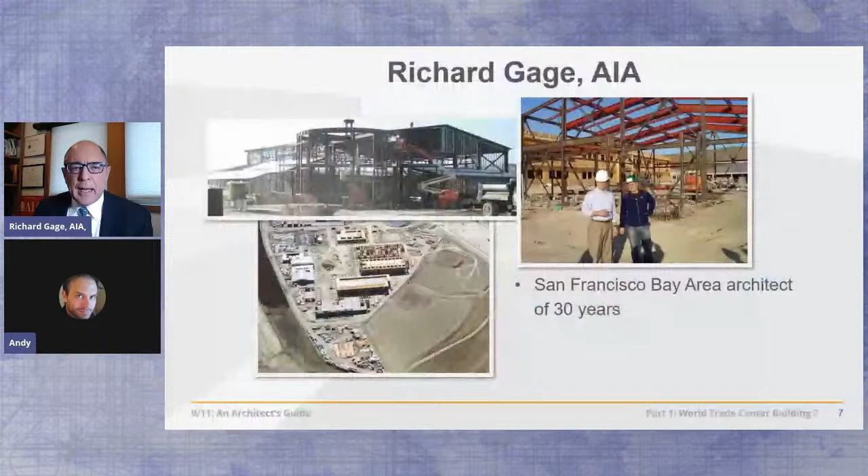Thank you, Andy. Just so people know something about my background: I was responsible at a local firm here in the San Francisco Bay Area for the construction documents for these $3 and $10 million gymnasiums. More recently, before launching full-time into this outreach effort, I had similar responsibilities working on this $125 million high school, and also this project in Las Vegas with 6 blocks of retail, mid-rise office space, and parking structure, altogether about 1,200 tons of fireproofed steel framing.

I now work full-time educating architects, engineers, and others to understand what really happened at the World Trade Center using the material in these courses. So let's jump into it.

Did you even know? I didn't. When I first got into this in 2006, I was shocked to learn there was a third skyscraper that came down on 9/11. Most architects and engineers are completely unaware of it, even though it's the third worst structural failure in modern history. So don't feel bad if you didn't know about it—most people don't. We're starting with this today because, according to the official story, nobody died in this building, so it didn't receive the attention it should have.

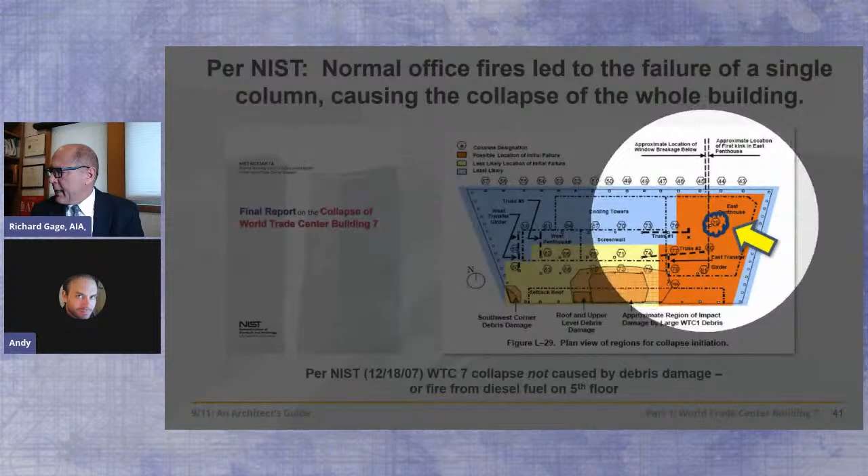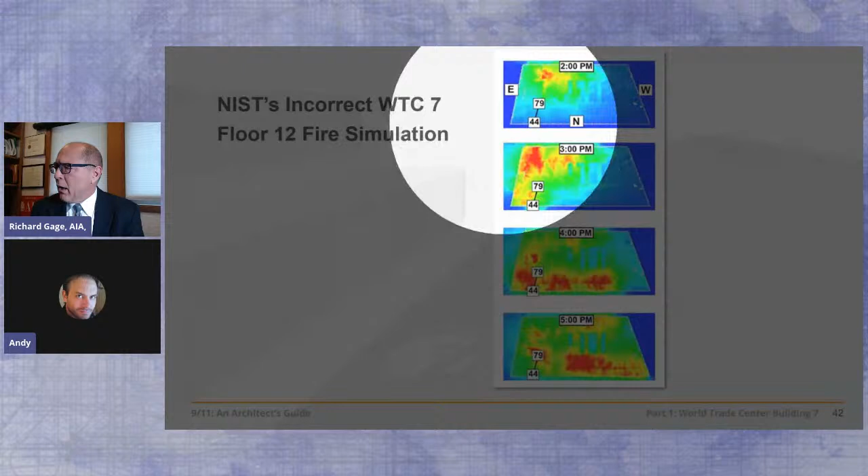Column 79 is the area of concern. The damage was on the other side of the building, so that's why they're suggesting it was relatively insignificant in the building's collapse. But they have a path of the fire that they claim it took, being the fire on the 12th floor, because that's of critical concern for them, as that fire moved its way over to column 79, hovering around column 79 on the northeast side of the building for about an hour and a half.

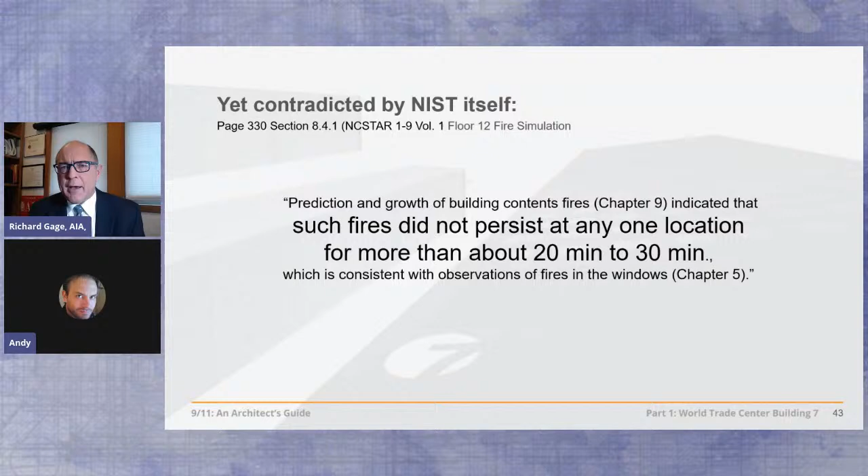So we find there's a problem with this—not just one problem, but as NIST even acknowledges, fires don't persist in any one location for longer than 20 or 30 minutes. So how can it be hovering in that area for an hour and a half? That's a critical problem and inconsistency for them to solve.

But more importantly, those fires were burned out on the 12th floor, according to the photographs, more than an hour before the building collapsed. And as you'll see, their entire collapse theory revolves around that fire burning on that floor at that location at the time of the collapse. So this is critically important.

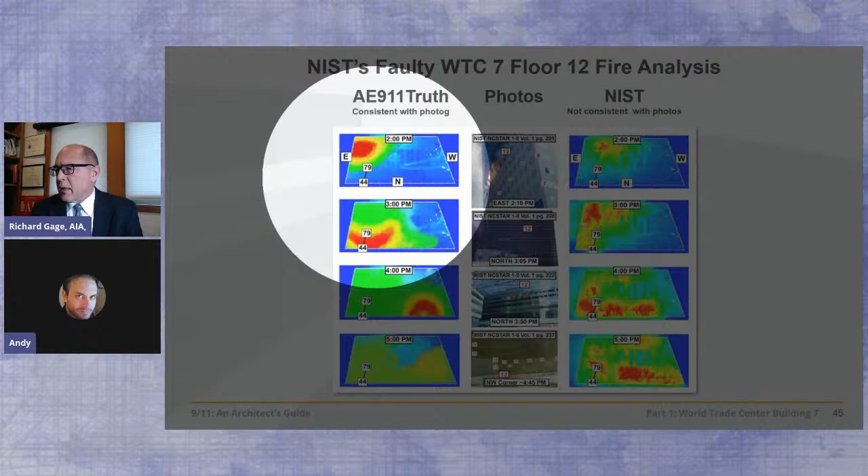Now, more correctly, the photographs show that fire—according to our own simulation, we have the fires starting at 2 o'clock on the east side, moving past column 79. By 4 o'clock they're well past column 79, as the photographs and videos reveal. And their fires completely burned out on that floor before the building collapses, even at 5 p.m. So that's really, really important.

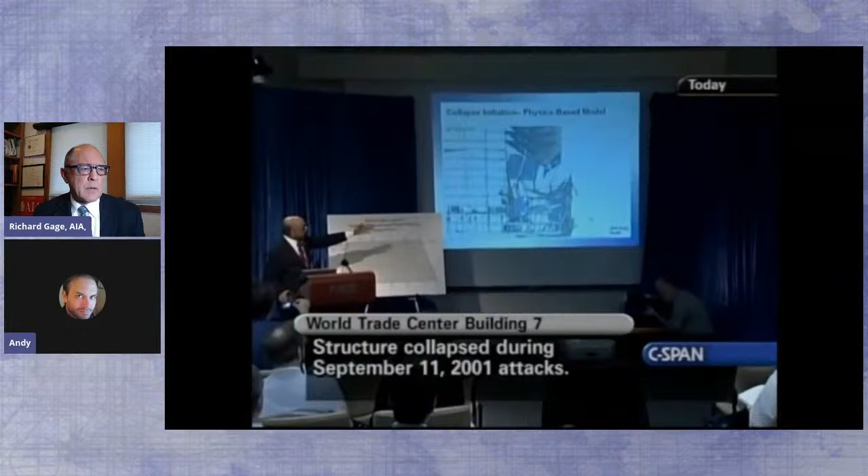Okay, so fire is inducing a progressive collapse by thermal expansion. Let's go a little deeper into their computer model. You can see on the screen, the column at the very right is column 79. That's the column that first buckles, causing the floors to come down, followed by a quick succession of failures of adjoining columns.

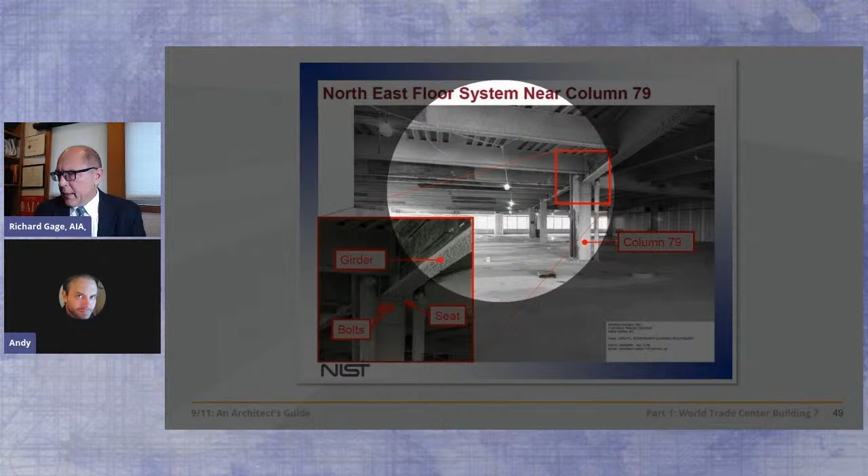Okay, let's break that down. Let's look at the actual theory here. What they're saying is that the fire near this column 79, raging in this area at the time of the collapse, caused these beams to expand—that's the thermal expansion part of their story—pushing this girder off of its seat on column 79, causing floor 13 to fall on 12, 12 on 11, and so on for 9 floors, leaving column 79 unbraced, at which time it buckles, causing this progressive collapse on the east side of the building that they claim then took another 7 seconds to drop the whole building straight down uniformly, as you saw in the videos.

So none of that could actually be true, and let's just break it down. These beams are fireproofed. They're not going to be able to attain the heat required to expand them. And here you can see halfway through the application of that fireproofing—this one's not fireproof, this part of it is. They're just not done yet.

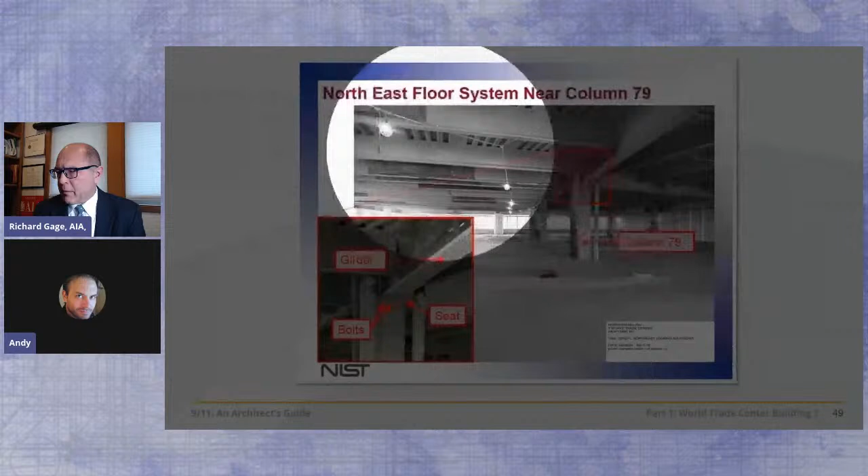That fireproofing, as you'll see later, is at minimum 4 times more fireproofing than is needed to protect that beam from thermal expansion. That's because the fire only lasts 20 minutes in a given area, while the fireproofing lasts 2 hours on beams in these steel frame high-rise buildings.

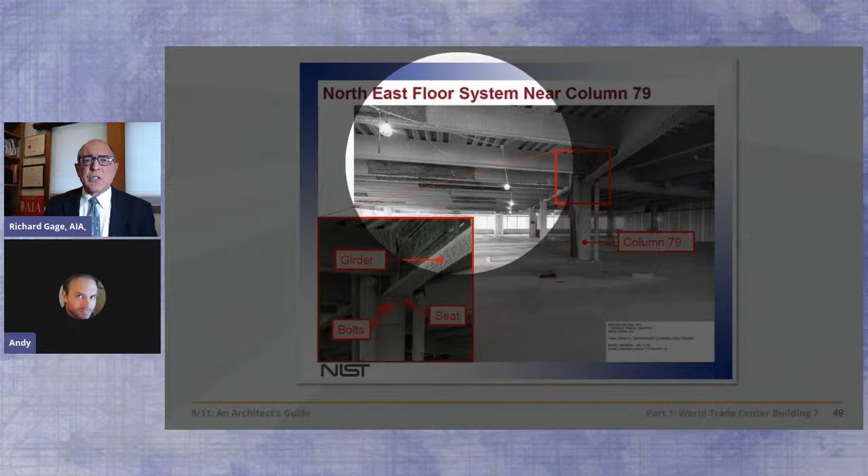So not only that, but the girder could not have been pushed even if that beam did expand. And by the way, they got that beam to expand by putting all of the heat, like 1400 degrees Fahrenheit, into that beam in just 1.5 seconds in their computer model, which would have forced it to expand rather than sag. But no, they needed it to expand because they needed this girder to fall off of its seat.

So they claimed that there were no shear studs on this girder, even though the shop drawings indicate that there were, as you can see here. 30 shear studs, which are bolts that are embedded in the steel, welded to the steel and embedded in the concrete slab up above. So that girder is not going to be pushed sideways.

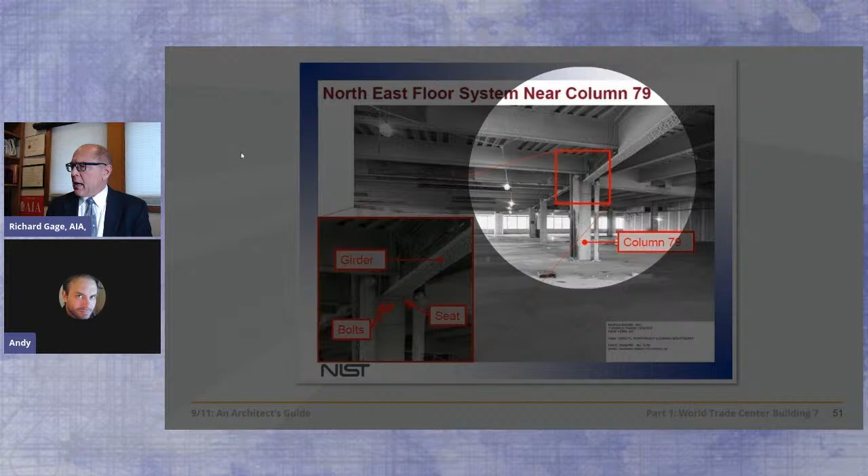No way, no how. But they ignore that key structural component, and they claim that this girder pushed off of its seat. Now here's the seat. It would have had to have been pushed 12 inches in order to be pushed off of its seat. The thermal expansion, even if these beams were pushing on it, could only have pushed it about 5 inches.

Well, NIST said it only had to be pushed off 6 inches, because the flange, the bottom piece of this wide flange beam, folded after the web crossed the end of the seat. So they ignored another key structural component in order to make that happen.

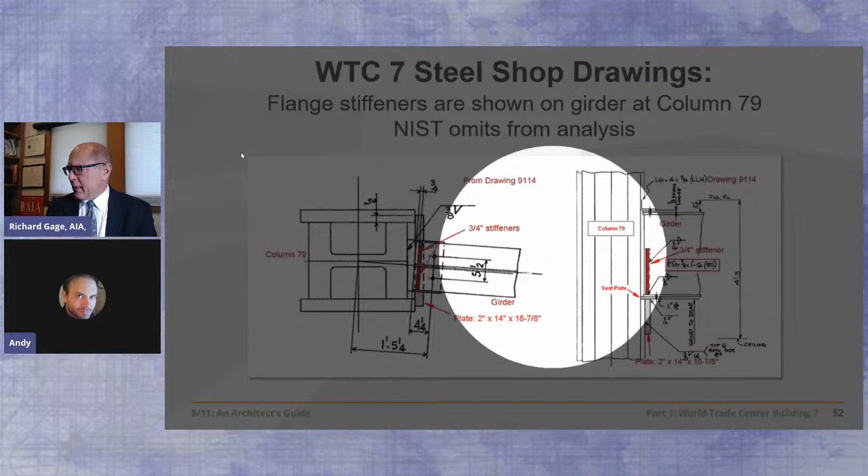These 3/4 inch stiffeners shown in red here in plan, and here, and here in elevation. So those were in fact there. The shop drawings here show them.

So there's only one reason NIST could have had for ignoring them: so that they could make this claim that this girder pushes off of its seat in this direction, and only halfway, and then the flange folding. Well, those stiffeners would have kept the flange from folding.

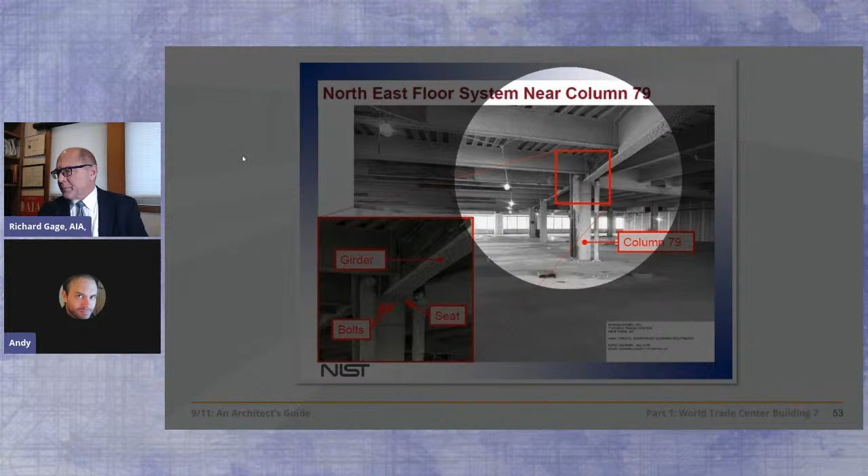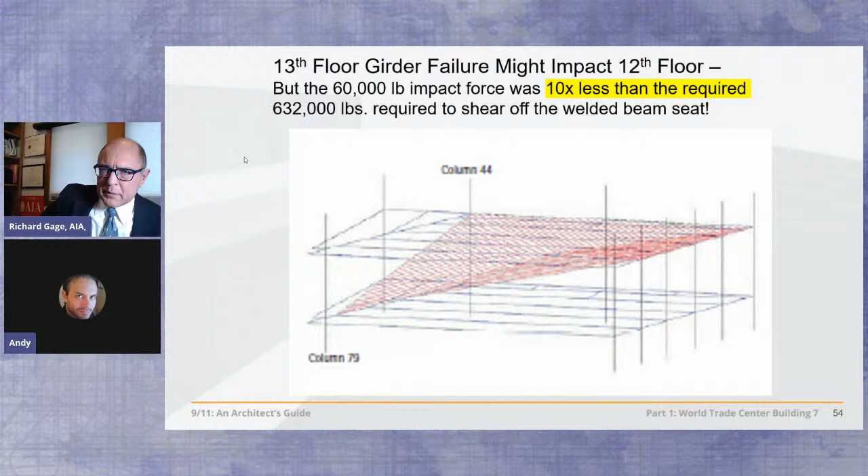So even if all of that could have happened, you would not have had floor 13 falling, because there's two other major girders framing into that column, which would have kept most of that floor from ever falling at all. In fact, it would have taken 10 times more dynamic force than was available in this system in order to break the floor connections, girder connections below.

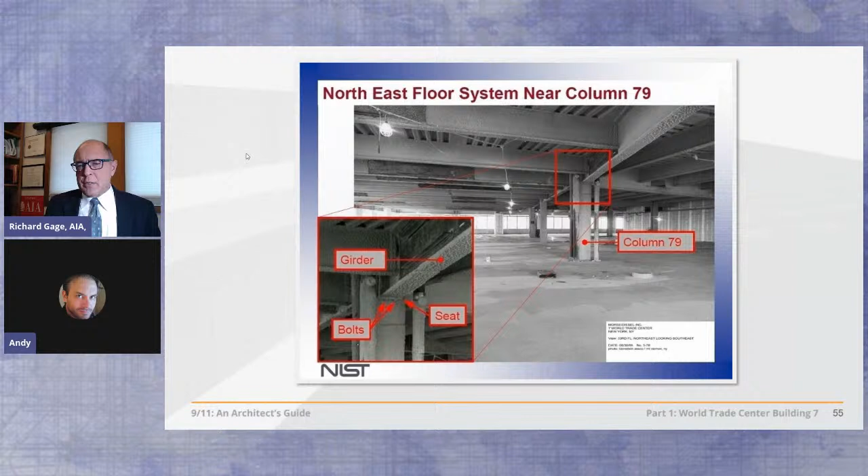It would have taken 632,000 pounds, but there's only 60,000 pounds available. So that progressive collapse never could have happened, even if all of their fanciful machinations in this initiation of collapse theory were true.

Let's go ahead and look at their computer model, because it's even more revealing. Here is our structural model showing the building collapsing, which matches quite well with the video of the event, they claim. We'll see how well it matches. In fact, let's do that right now.

Here's the video on the left. The penthouse comes down first, okay, we'll give them that. But then there's a complete destruction of almost every connection holding the steel frame together on the east side of this building, and it begins to warp like a beer can, like you'd expect it to, because those beams are tied to the exterior perimeter structure.

So you'd expect massive deformation on the exterior of the building with any interior progressive collapse commencing. But you don't see that in the video whatsoever. You see maybe a dozen windows broken, indicating there's some shock to the building, but not the scale of destruction that we're seeing. And even they stop the computer simulation 2 seconds into the collapse, indicating that they don't want us to see any more of the overall collapse.

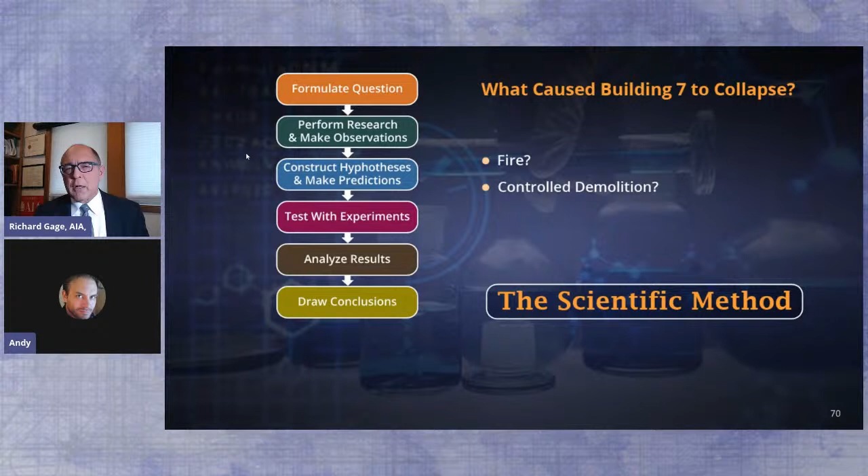If the hypothesis is corroborated, we report the results in an open, transparent manner. We don't hide the computer input data from the architects and engineers who might peer review the work, especially in a public investigation like all of 9/11 was or should have been.

If a hypothesis is not corroborated, we go back, we try again, we come up with new hypotheses until we have one that is corroborated by the data, the experiments, the predictions, etc., until it all makes sense. So with that in mind, let's do just a little bit of background research, which NIST apparently failed to do.

How have buildings been destroyed by fire? Well, not in a high-rise building have we ever lost a high-rise due to fire, a steel frame high-rise, fireproofed. But fire is an organic process.

It moves through a building every 20 minutes or so. It burns out, because even NIST acknowledges that fires don't last longer than 20 or 30 minutes, even though their whole theory relies on an hour and a half of the building on fire on that floor.

The skyscrapers we have not lost. In a wood frame building, it would have fallen over to the path of least resistance, not straight down through the cold, hard, intact structure beneath the level of the fire. We would never expect a pancaking collapse due to fire.

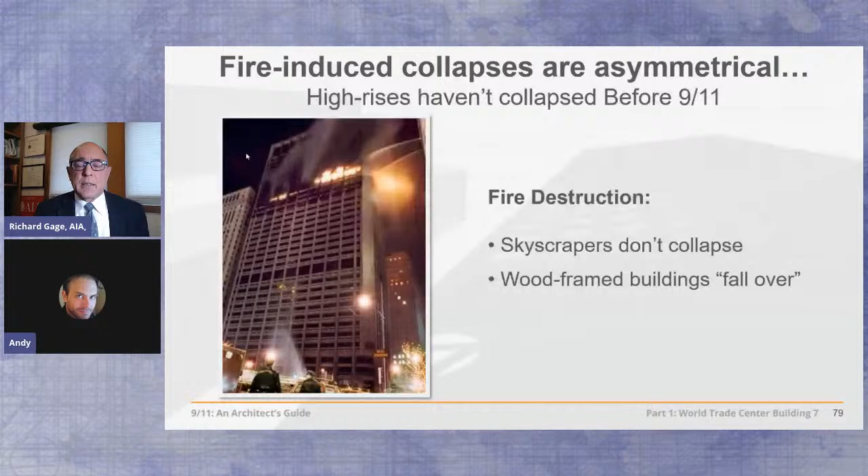Well, what would we expect in a steel frame building on fire? We had the largest test of its kind in the UK in 1995. They had incredible fuel loads. As you can see here, they really wanted to know what happened to these beams.

So they built this 8-story building out of steel, as you can see, some of which is fireproofed and some of which is not. They tested every condition. It was a very rigorous test. This was the largest test of its kind ever conducted.

It showed how unprotected steel can be distorted, even by a normal office fire. But as is typical in steel buildings, the structural beams only slowly and progressively warped and sagged. There was no chance of a sudden collapse.

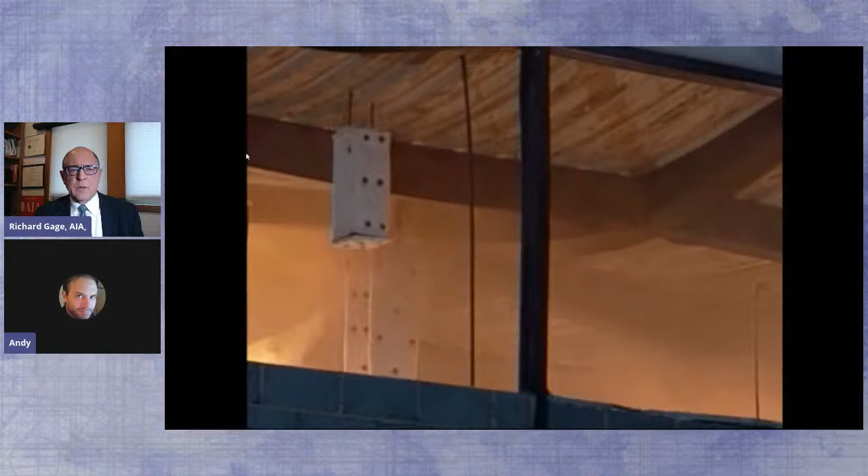In over 20 years, I have not seen, until recently, a protected steel structure that has collapsed in a fire. He's referring here to before 9/11, when we had not 2, but 3 protected steel structures collapse due to fire that day.

The executive summary cites that this is inherently stable behavior due to the highly redundant nature of the structural steel form. The connections do not fail. NIST had 400 structural steel connections failing per second during the 7 seconds of the overall collapse of that building.

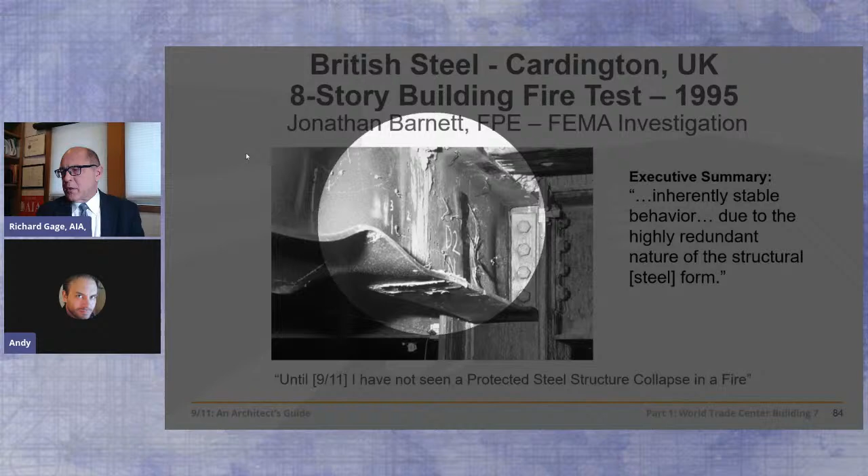There's warpage that can occur, certainly, on non-fireproofed portions of this test building. All of Building 7's steel was fireproofed. So we haven't lost a skyscraper that's fireproofed, steel framed, due to fire.

Let's look: May 4th, 1988, the First Interstate Bank, a 62-story building in Los Angeles, California, suffered a 3.5-hour fire which burned across 5 floors and caused an estimated $200 million of damage. It did not collapse. February 23rd, 1991, the One Meridian Plaza, a 38-story building in Philadelphia, suffered an 18-hour fire which burned across 8 floors.

The fire caused an estimated $100 million worth of damage and 3 firefighters died fighting it. It was later described by officials as the most significant fire of the century. It did not collapse. October 17, 2004, the East Tower of the Parque Central complex in Caracas, Venezuela, suffered a 17-hour fire which spread across 26 of its 56 floors.

It did not collapse. August 18, 2007, a fire broke out on the 17th floor of the Deutsche Bank building in New York, a building undergoing deconstruction after being heavily damaged by debris from the South Tower on 9/11. Originally 41 stories in height, it had been reduced to 26 at the time of the fire, which lasted 7 hours and affected a total of 10 floors. 2 firefighters died of smoke inhalation.

It did not collapse. On 9/11 itself, 5 World Trade Center, a 9-story building east of the North Tower, was engulfed in flames after sustaining heavy damage from falling debris. A number of partial collapses occurred, but the overall structure remained standing.

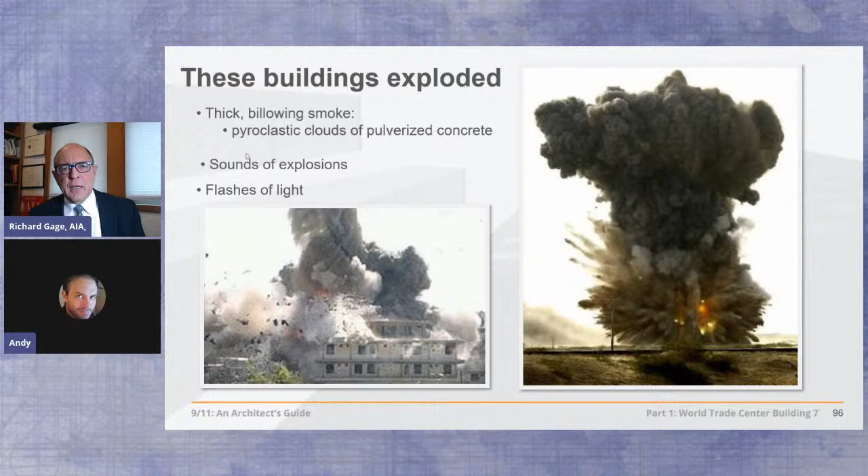We have witnesses that hear sounds of explosions. They see flashes of light. If we have these features, we know we have explosions.

Explosions can be harnessed quite effectively in high-rise buildings to bring them down, as you see in this series of controlled demolitions, just like the old hotels in Las Vegas that we've all seen on TV. There's only a handful of companies that can accomplish this. It's actually quite intricate engineering to place these shaped cutter charges throughout the columns and beams in the building at key locations and detonate them in a very precise order in order to bring the building down how they want.

So there's a set of features associated with these demolitions. What are they? Let's look at them. We have a sudden onset of destruction, usually at the base of the structure, but not always - it can occur other places too.

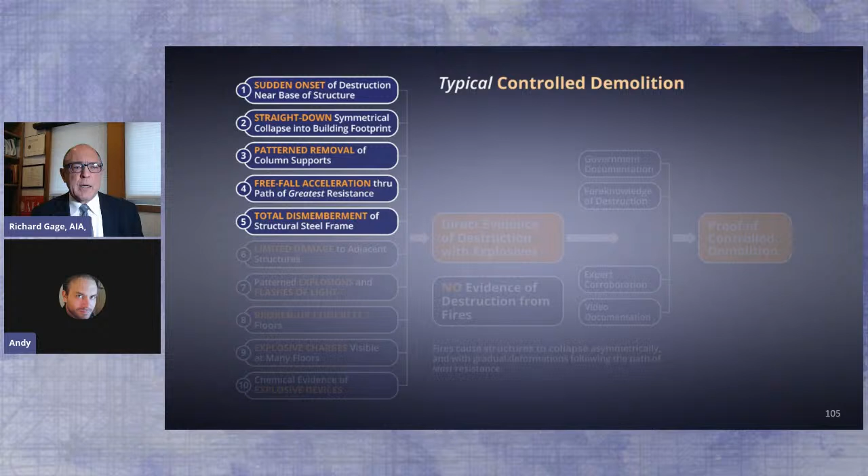Straight down, symmetrical collapse into the building's footprint. They do that by removing the column supports all at once on a given floor, or within a fraction of a second of each other. This results in a near free fall acceleration straight down through the path of what should have been the greatest resistance - the thousands of tons of structure beneath - resulting also in the total dismemberment of the structural steel frame. With limited damage to adjacent structures - that's one of the goals of controlled demolition.

Feature 7: there's patterned explosions heard by witnesses and flashes of light seen by them. The concrete floors are broken up, if not pulverized, as we'll see in Building 7. They don't want to have to go back and jackhammer concrete floors, so they let the explosives do that work. And so there's explosive charges visible at many of the floors. Sometimes these are called squibs in the explosives demolition industry. And of course, chemical evidence left behind of explosive devices.

If you have these features, you can be sure that you have destruction with explosives. Fire doesn't create these features, any of them, let alone all of them. Fires cause structures to collapse asymmetrically with gradual deformations following the path of least resistance.

With additional circumstantial corroborative testimony and evidence - eyewitness testimony like government documentation - that can be very helpful. You don't just bring one of these buildings down without a series of approvals from various agencies, typically. So there's foreknowledge of the destruction. Therefore, people know about it in advance. They talk about it - we'll see some of that today.

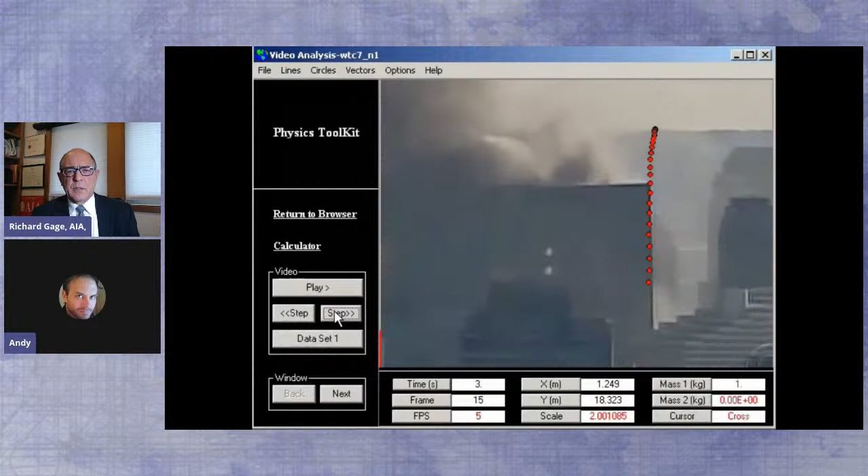Take a look at physics teacher David Chandler's analysis here. Just by watching it, anybody can see that Building 7 fell close to free fall. To measure it, I used software to track the corner of the building and compute a graph of downward velocity as a function of time. The graph had a long, straight section indicating constant acceleration. Measuring the slope, I found the acceleration to be within 1% of the acceleration of gravity for the first 2.5 seconds. In other words, the building fell through its own structure with zero resistance.

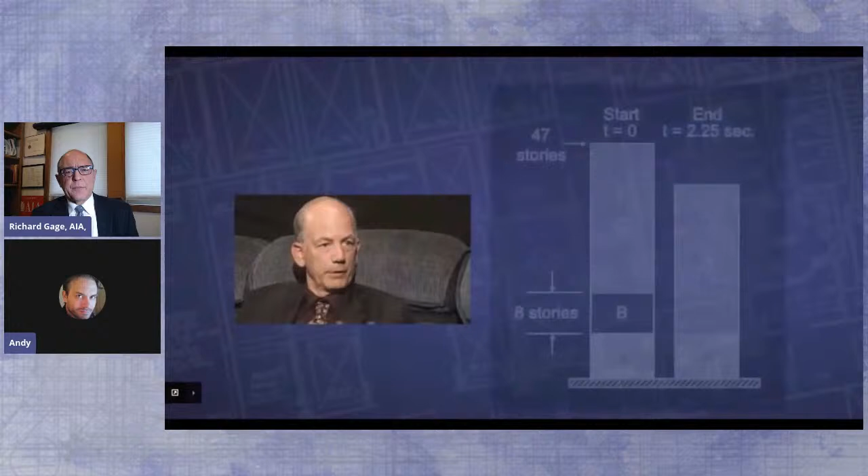Zero resistance? This building had 40,000 tons of structural steel in its structural system, and that is intended to keep it from going anywhere. NIST is telling us that the building below it ceased to exist for the first few seconds of the collapse. Well, things in physics just don't cease to exist and cease to resist the forces that are on them.

The building didn't disappear, so the building can't fall for 100 feet at free fall speed. That's impossible. That's a violation of the fundamental law of physics that says for every action, there's an equal and opposite reaction.

Indeed, there is. In fact, steel columns have a particular property that even after they buckle and bend, they will always have a minimum of about 25% of their strength left to support. It won't necessarily support the building, but it will slow down the acceleration.

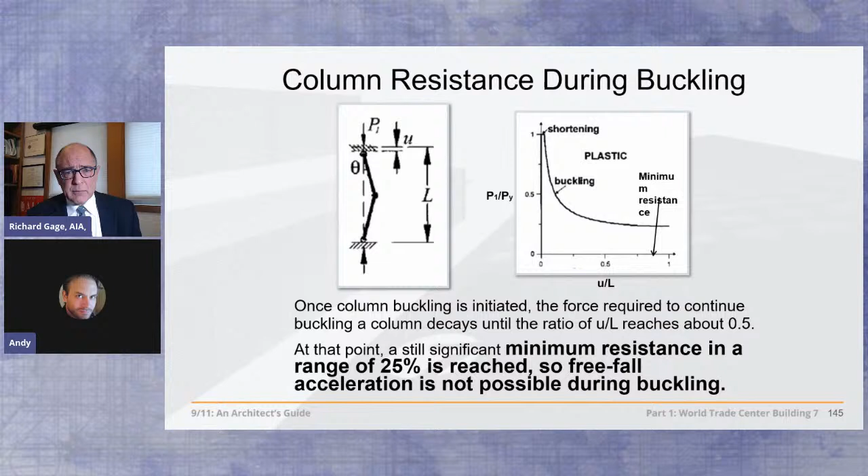But even NIST acknowledges there was no slowing down. It accelerated faster and faster, the velocity increasing each second, the definition of acceleration. It's as fast as a bowling ball falling out of the sky, which means zero resistance, which means not one of those 82 columns on each floor gave any resistance during a third of this building's 7-second collapse.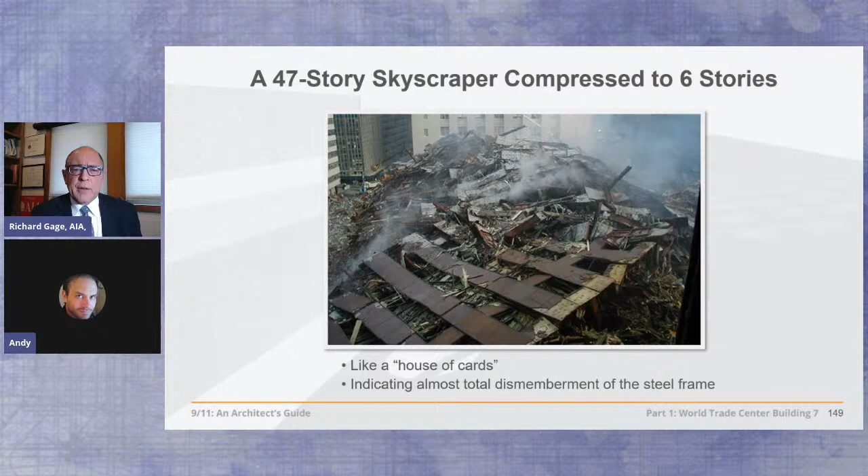Think about it. It can't happen. And do we have the total dismemberment of the structural steel frame? Yeah, it falls like a house of cards. Every column is dismembered almost from every other beam attached to it. Remember, buildings that collapse naturally, you don't have the severing of the columns from the beams.

Some of them certainly in badly damaged buildings like this. Do we have limited damage to adjacent structures? Yeah, there's fairly limited damage. The Verizon building and the post office sustained some damage, but the center of the pile is in the center of the building's footprint.

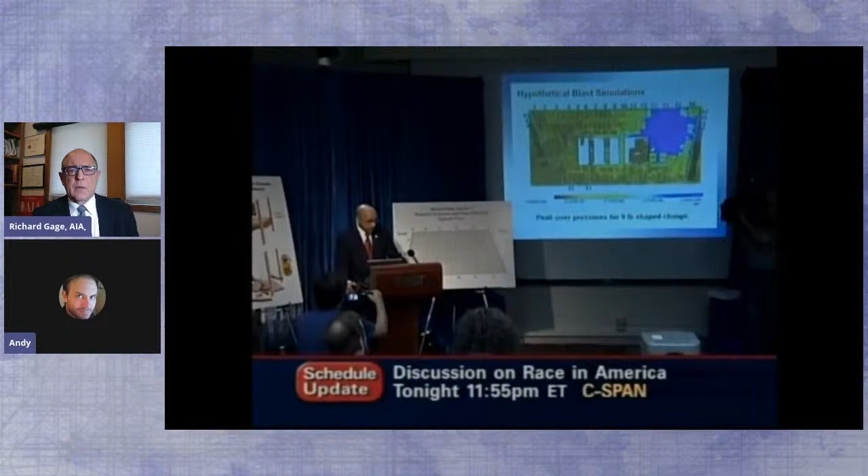Do we have sounds of explosions heard by witnesses? Well, let's go first to the official story. We did not find any evidence that explosives were used in the collapse of Building 7. We ran detailed computer simulations of blast scenarios. This size blast would have produced an incredibly loud sound that was not recorded on videos of the collapse nor reported by witnesses. Well, there are plenty of witnesses, and I'll show them to you. And we'll look at some technology that has even softer sounds to bring down buildings.

First, Daryl, a medical student: We were watching the building because it was on fire. The bottom floors were on fire, and we heard a sound that sounded like a clap of thunder. We turned around and were shocked to see it looked like there was a shock wave ripping through the building, and the windows all busted out. It was horrifying. Then about a second later, the bottom caved out, and the building followed, crashing down all the way to the ground.

Let's go to Kevin McPadden, former Air Force medic: And then it was like another 2-3 seconds, you heard explosions, like boom. It's a distinct sound. It's not like when in compression, like boom, boom, boom, boom, floors dropping and collapsing. This was boom, and you felt a rumble in the ground, like you wanted to grab onto something. That, to me, I knew that was an explosion. There was no doubt in my mind.

And this gentleman, Bill Rizzotti, was here when it all happened. He saw it for himself. Bill, tell us what you saw and heard. I was standing like 2 blocks away, and all of a sudden I just seen a big flash, and then I seen the building coming down, and I just seen people running everywhere, chaotic like.

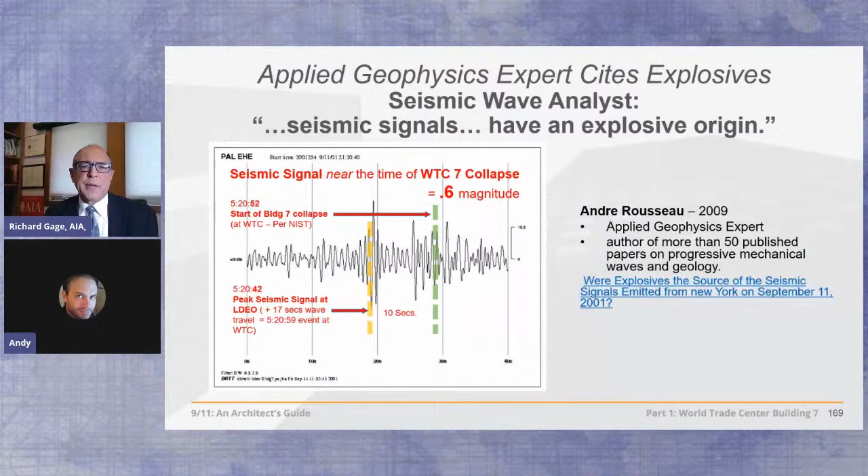Now, Andre Rousseau comes along, a geophysics expert, author of more than 50 published papers on progressive mechanical waves and geology, says no, these undeniably have an explosive origin. The bell-like form of the graph points to an impulsive source of energy, not percussion on the ground due to the falling of debris. Seismic waves are only created by brief impulses and low frequencies. These undeniably have an explosive origin.

Okay, what else can we learn from sources like the National Fire Protection Association Guide 921 for fire and explosion investigations? Because we're looking here for answers to where all these pyroclastic-like clouds and extreme heat came from. It says in the manual, look for large volumes of gas and the large amount of heat released in chemical explosions, causing rapidly expanding plumes of hot gases.

Well, this is exactly what was observed directly after the collapse, or as the building's collapsing, racing 35 miles an hour away from the collapse of Building 7. These clouds are expanding in every direction in cauliflower-shaped forms, expanding rapidly, many, many times larger than the building. Where's all the heat coming from that's responsible for this cauliflower-shaped expansion?

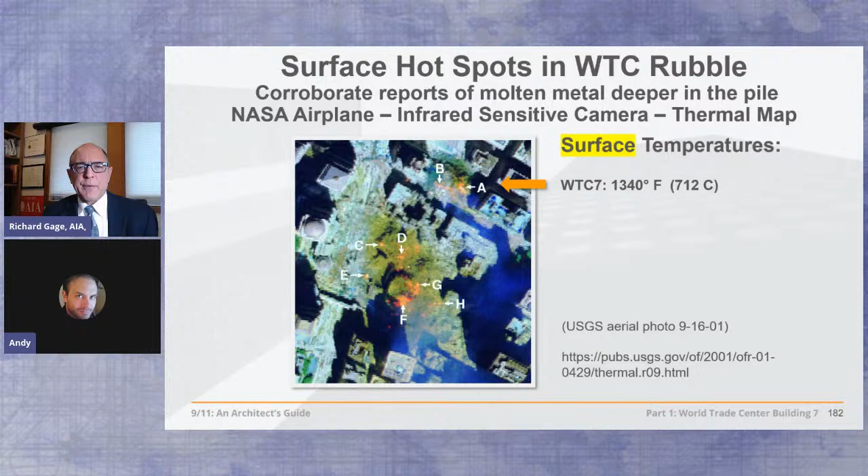But do we have a fire on the surface of this building aftermath? No, there's no fire. Again, surely the fires were put out. Why is there 1,340 degrees on the surface? It's surely evidence of something much hotter down deep in the pile, which as it reaches the surface is cooled off to 1,340 degrees. And we find such evidence.

Let's start with structural engineer Abolhassan Astaneh-Asl: I saw melting of girders at the World Trade Center. Office fires don't melt girders. I saw melting of girders in World Trade Center.

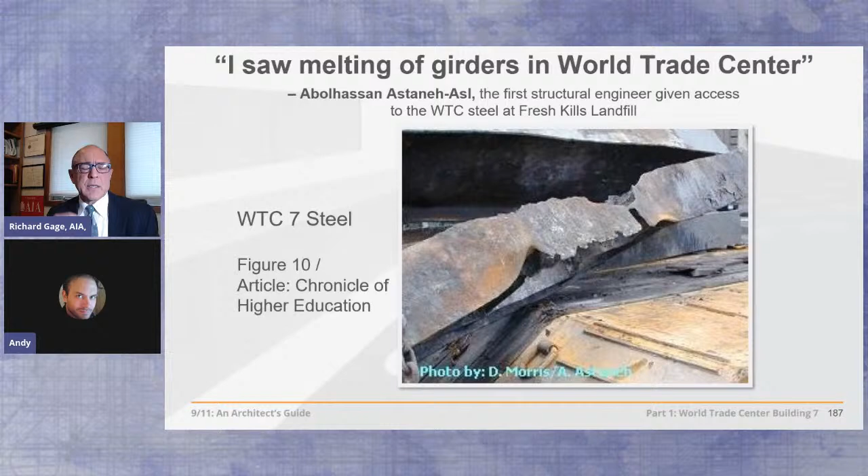Well, these are the melted girders he's referring to in part, and this is one that he documented from the World Trade Center 7 steel. That is the melted girder. Again, steel doesn't begin to melt until 2,800 degrees, more than twice the temperatures of the hottest office fires. This fire engineer says steel members in the debris pile appear to have been partly evaporated in extraordinarily high temperatures. The author of the FEMA report, fire protection engineer Jonathan Barnett.

There's a problem here, though. It takes 5,000 degrees to evaporate steel, more than 4 times the temperature of most office fires.

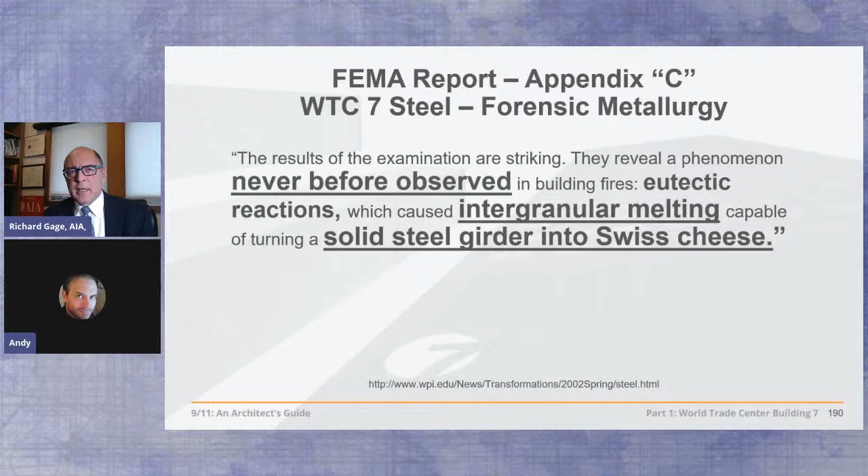This is actually documented in the FEMA report, which came out before NIST took over the investigation. Appendix C of the May 2002 Building Performance Team report documents never-before-observed eutectic reactions, intergranular melting, capable of turning a solid steel girder into Swiss cheese, like we see here in this piece of World Trade Center 7 steel. Rapid oxidation and sulfidation, the report finds. Liquid iron, that's molten iron, that's 2,800 degrees minimum Fahrenheit.

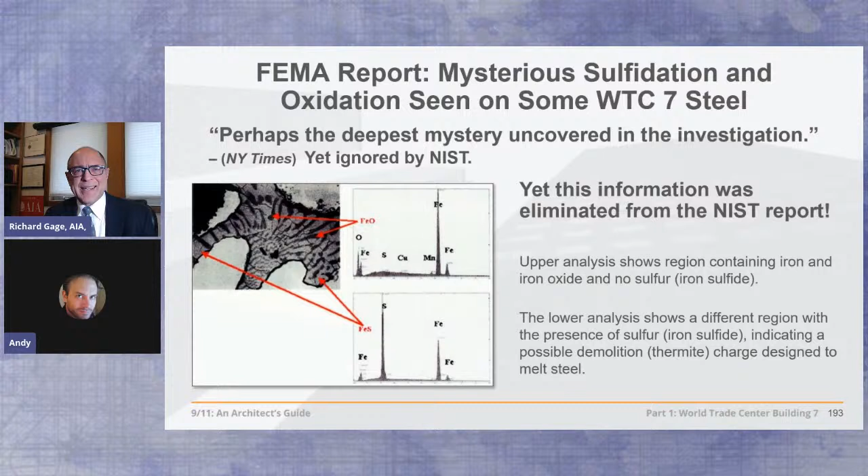Sulfur formed during this hot corrosion attack on the steel. They have no idea where the sulfur came from. Perhaps the deepest mystery uncovered in the investigation, says the New York Times, but this is completely eliminated from the report when NIST takes over. In fact, the whole report, Appendix C, metallurgical investigation, is eliminated from the NIST report, not included in the NIST report.

NIST says, oh, we couldn't test, we had no steel from World Trade Center 7. Well, you just saw the steel, but again and again and again, they lie, saying that there's no steel recovered, no metallography could be carried out. Well, we actually have metallography samples from NIST, and they show temperatures not exceeding 250 degrees Celsius.

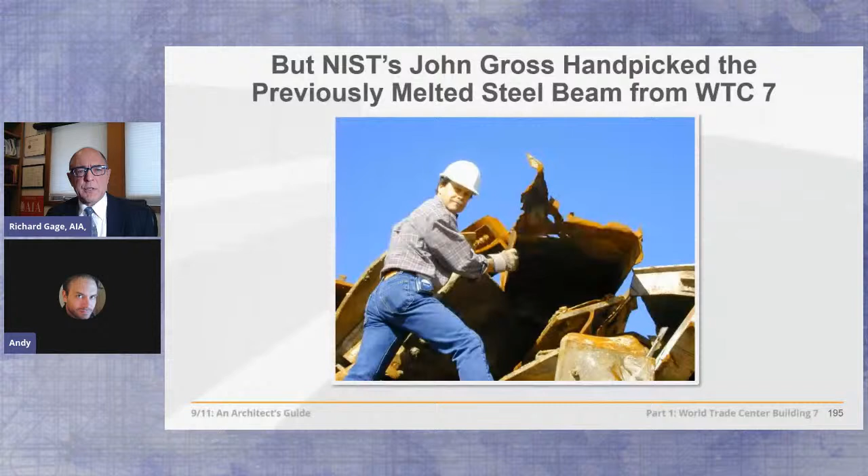That was in the World Trade Center Twin Towers. Here they're talking about 7. But here's the piece of steel they did recover. So they are lying. Here's John Gross on the pile, proudly showing the coupon or steel sample that was given to FEMA to include in Appendix C. And then John Gross saw fit to eliminate that when they produced their final report on Building 7. His shadow is all over the evidence.

So maybe the fires, according to Thomas Eagar, were 1,200 degrees Fahrenheit. There's a range of fires. NIST claims in the Twin Towers 1,800 degree fires. We'll get to that next week in parts 2 and 3, particularly 3, of this series.

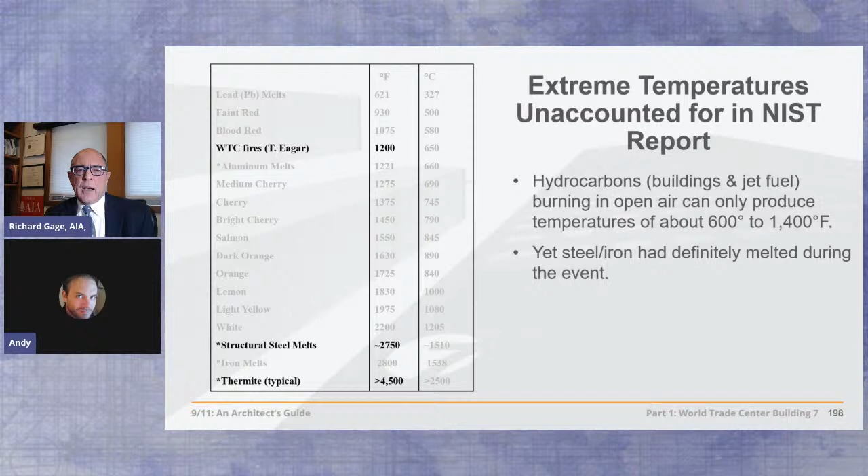Structural steel doesn't begin to melt until 2,750 degrees. What could be responsible for these temperatures? Well, hydrocarbons, which is building office contents and jet fuel even, only burn 600 to 1,400 degrees. Yet steel had definitely melted, as we see here in this debris, in the aftermath, in the jaws of this crab claw excavator. We can tell by the color of molten metals what their temperature is. In this case, exceeding 2,500 degrees, liquid molten metal falling.

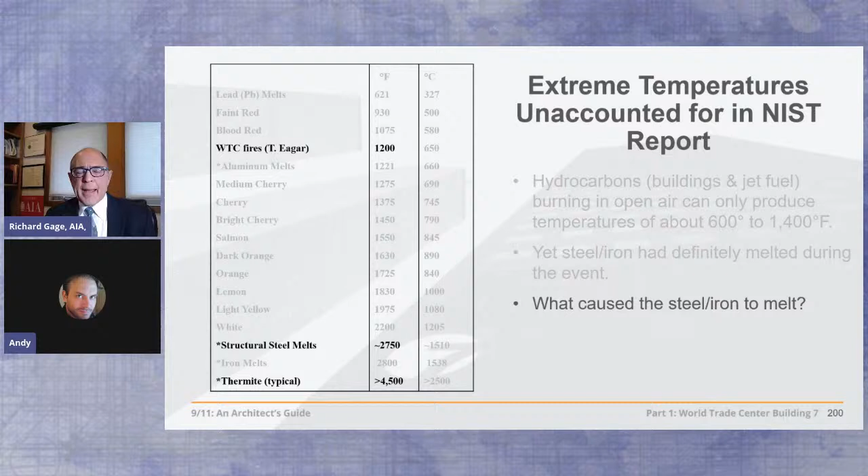So we know how hot it is, and we know that office fires don't get that hot. So what does? Let's look at thermite as a possibility. That's a rational hypothesis because it has some characteristics that match the evidence.

So what is it anyway? An incendiary used by the military, thermite is a compound of iron oxide and aluminum, which when ignited sustains an extreme heat reaction, creating molten iron in just 2 seconds. Thermite can reach temperatures over 4,500 degrees Fahrenheit, quite enough to liquefy steel.

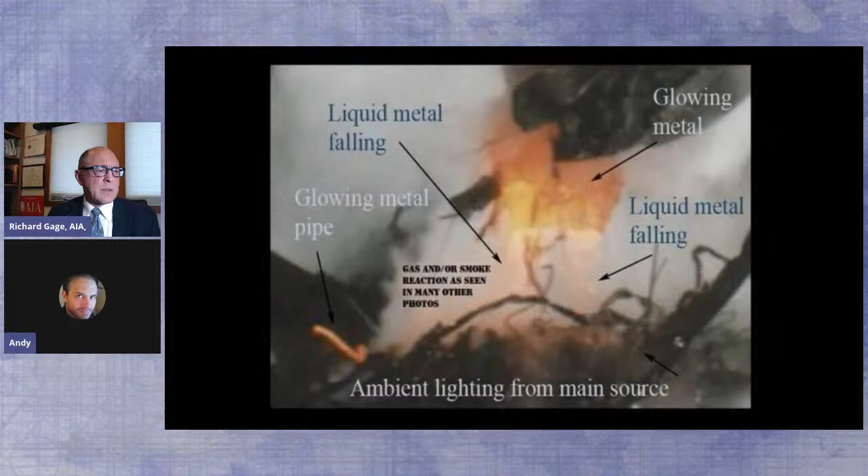We know that open-air fires cannot burn hot enough to melt steel, but metal had melted at the base of the towers. Appendix C of the FEMA report describes sulfur residues on the World Trade Center steel. The New York Times called this the deepest mystery of all. Sulfur slightly lowers the melting point of iron, and iron oxide and iron sulfide had formed on the surface of the structural steel. Sulfur used with thermite is called thermate, producing even faster results.

Maybe we're getting somewhere here, because if thermite were used, it would explain the incredible heat, 4,500 degrees Fahrenheit, that the official story can't possibly explain. And so they don't try.

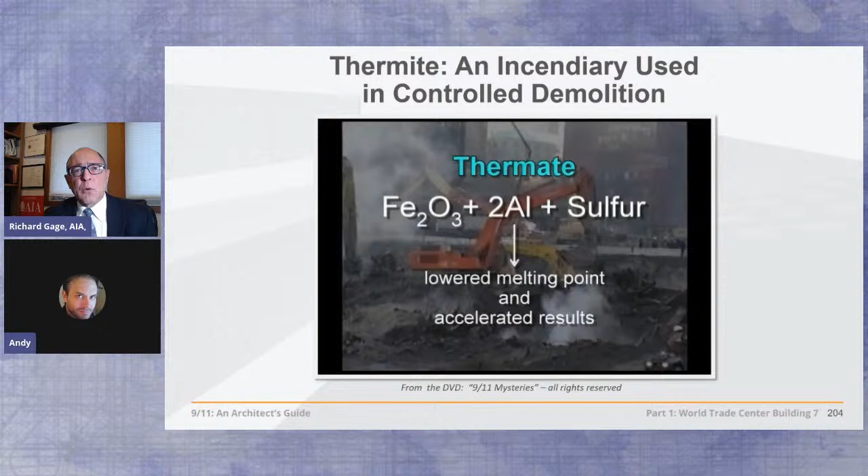It would also explain the presence of sulfur, because sulfur is added to thermite to become thermate, becoming much more effective at cutting through steel. And it would also explain the vast presence of elemental iron. Molten iron is a byproduct of thermite, which we're about to show you the evidence of.

So the National Fire Protection Guide 921 says, hey, look for unusual residues that could arise from thermite, magnesium, or other pyrotechnic materials. NIST found no corroborating evidence to suggest that explosives were used.

Did you look? A year later, when pressed, they finally admit in writing that NIST did not test for the presence of explosive residue. You can't find what you won't test for. This is completely disingenuous, of course. Others found it. It wasn't that hard to find.

Stephen Jones, nuclear physicist formerly from Brigham Young University, applies his talents to the effort, having been given a piece of slag from the ends of the steel beam in this sculpture in Canada. He first notes that the beam itself is a jagged cut with thick slag hanging off of it. That's not what oxyacetylene torches and thermal lances do, which is what the iron workers were using to cut the steel at the site. Not this jagged edge as you see here, but a nice clean cut as you see here. Not jagged edges like here with thick slag on them.

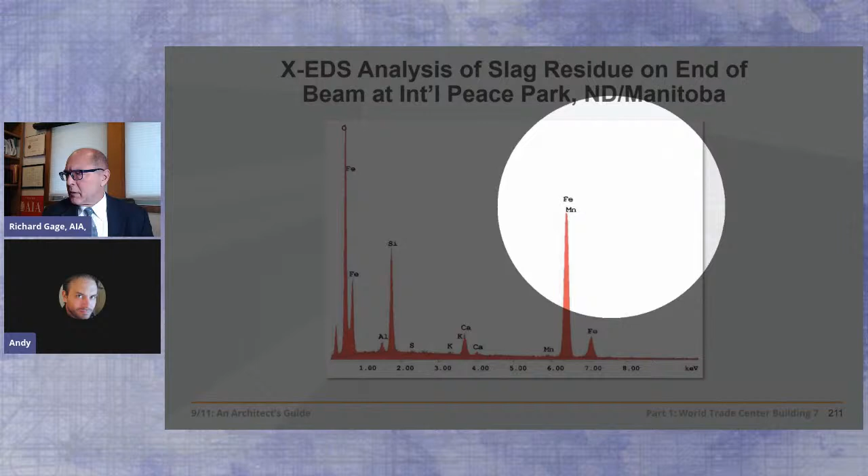But the analysis of this slag produces what? Iron. Elemental iron, not steel, but elemental iron and manganese. And sulfur. And aluminum. Thermite, as you saw, was a mixture of aluminum powder and iron oxide, which is essentially rust.

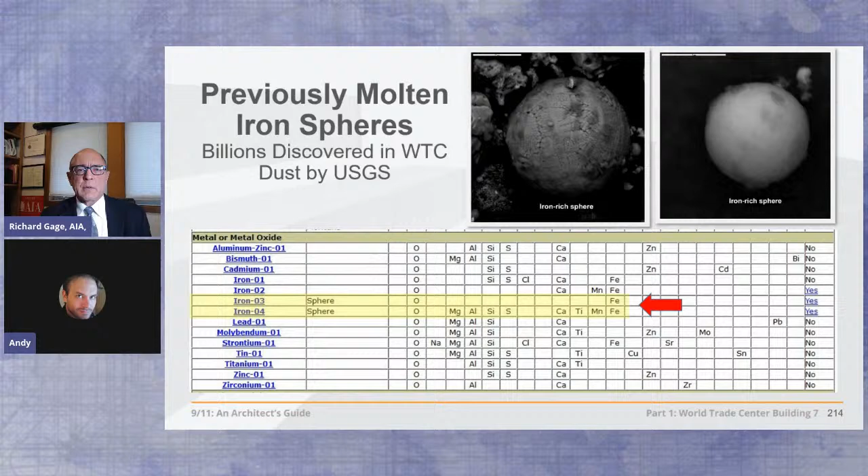So it's very interesting. Why is he finding the ends of these beams having this evidence? Well, he looks at the U.S. Geological Survey itself, in their particle atlas of the World Trade Center dust, who finds in all of their samples billions of previously molten iron microspheres. Billions of them. They don't know where they came from. They don't even speculate. But up to 6% of some of these samples are previously molten iron microspheres, about a 1/16 of an inch in diameter, the largest of them.

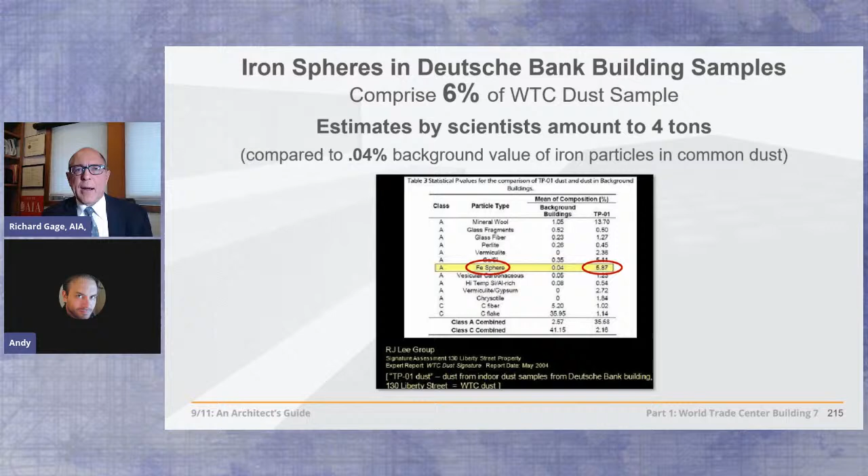Some of them almost invisible to the naked eye. It amounts to about 4 tons of this material by extrapolation, 150 times more than the background value quantities of iron that you can see in office dust. It's just there in the air. No, these are spherical, and they are much more plentiful.

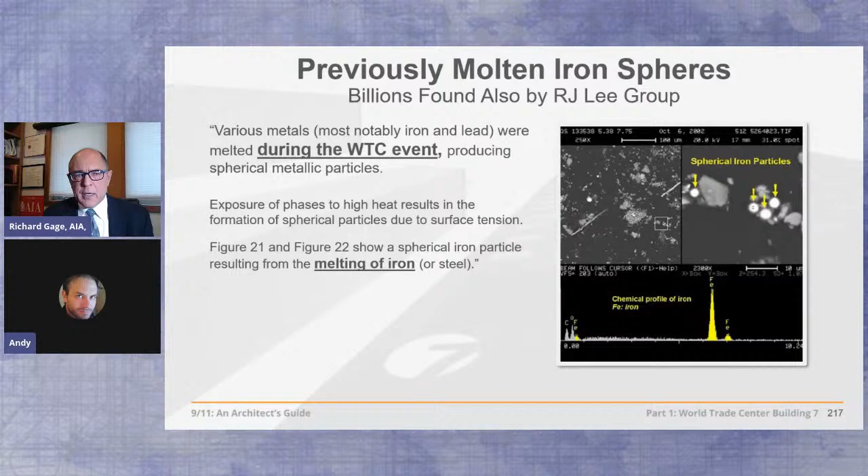In fact, the R.J. Lee Group, an independent environmental engineering firm doing their own studies on the dust, says that they're formed during the event, not before by the welders putting the building together, not after by the ironworkers cutting the building apart, but during the event, the melting of iron, requiring again 2,800 degrees Fahrenheit. In fact, the EPA says this is a signature component used to distinguish the World Trade Center dust from common office building dust. It's not even World Trade Center dust unless it has these billions of previously molten iron microspheres in it. Well, how would they get there?

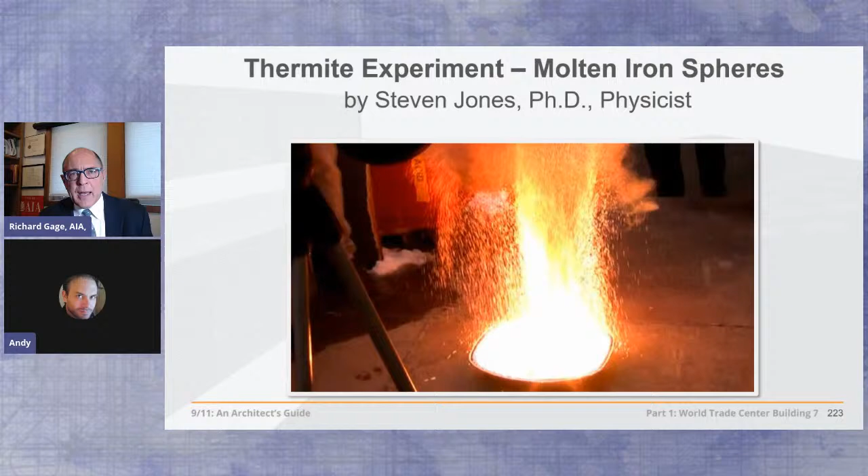Well, here's the thermite experiment. The experiment is the arbiter of competing hypotheses. In this experiment, we have a small amount of thermite, which produces a large flash, extreme temperatures, and lots of what he thought were sparks, but no, this is molten iron microspheres. How do they get spherical? Well, aerosolized liquids form themselves into spheres by surface tension. That's just the nature of what it does.

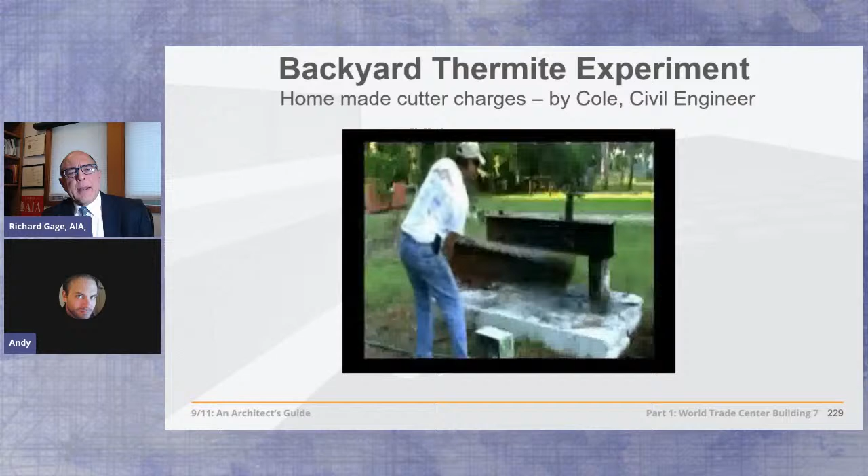So you can make thermite in your own backyard, and cutter charges, as John Cole, civil engineer, did in Florida. Take a look. You can see these explosions, and you can hear them, but they're not quite as loud as the bangs produced by high energy explosives. But they still have sound that's heard, cutting in this case almost cleanly through this beam.

Well, there are much more effective devices, patented prior to 9/11, 2001, that use thermite in shaped cutter charges for the purposes of cutting through much thicker sections of steel, like we have in the World Trade Center buildings. Some of that steel is 3 and 4 inches thick, projecting molten iron in hundreds of milliseconds to cut through. So maybe that's the reason, or one of the reasons, they didn't want to use more commonly applied high energy explosives like C4 and RDX, because they don't have the capability to break through 4-inch thick slabs of steel, as we have near the bottom of the Trade Center towers, all three of them.

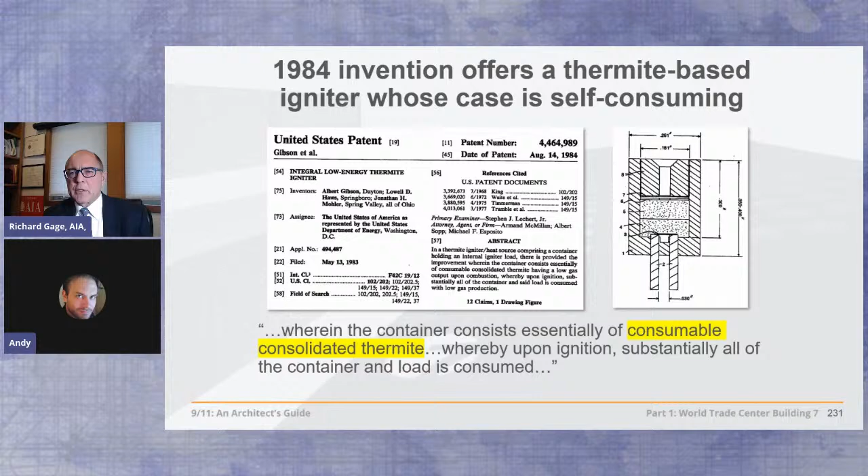And they would also provide a much louder bang and a brighter flash, completely giving away the deceptive controlled demolition that we're looking at in the case of this building's destruction. So we also have a softer signature. In fact, there are similar devices whose casings themselves are made of consumable, consolidated thermite, leaving nothing behind but pools of molten iron, which we have plenty of evidence for, which we'll get to next week in this 3-part series. But what else was found in the meantime in the World Trade Center dust? A 3-inch thick blanket of powder throughout the World Trade Center.

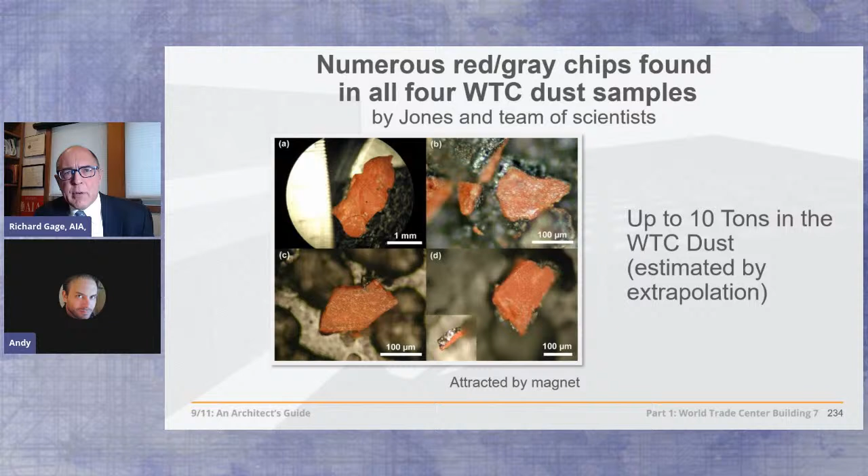Through a rigorous analysis, the samples are red-gray chips they found in them. They're attracted by a magnet. They get real curious—red on one side, gray on the other, dual layered, indicating they were applied by fluid, like a paint. They thought they were paint at first, but they're attracted to a magnet.

So they zoom in and analyze the red layer very carefully. And what do they find? Again, iron and aluminum, the key ingredients of thermite.

But they get real curious now. Zoom in 50,000 times with a electron microscope and find what? Nano-sized particles, 1,000 times smaller than a diameter of human hair, of the ingredients of thermite. Iron oxide crystals, aluminum platelets, set in an organic bed of oxygen, silica, and carbon.

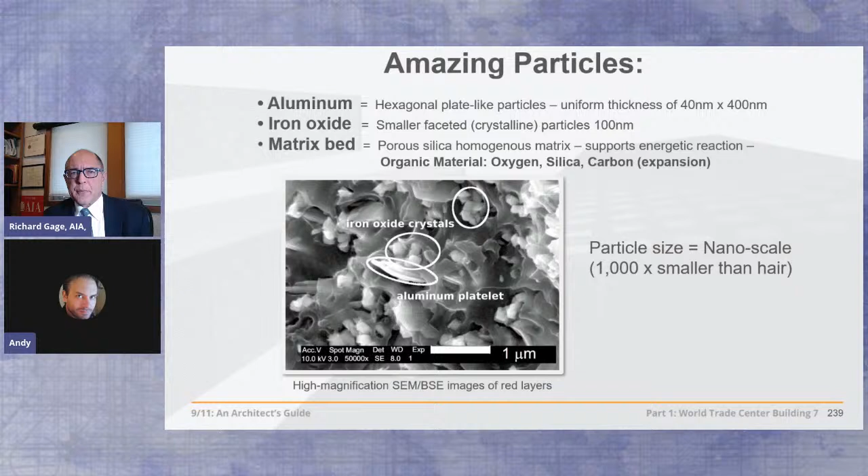Interestingly enough, at 420 degrees Celsius, about 788 Fahrenheit, these samples ignite, producing an exothermic reaction, much more energy coming out of these. It's not paint, in other words.

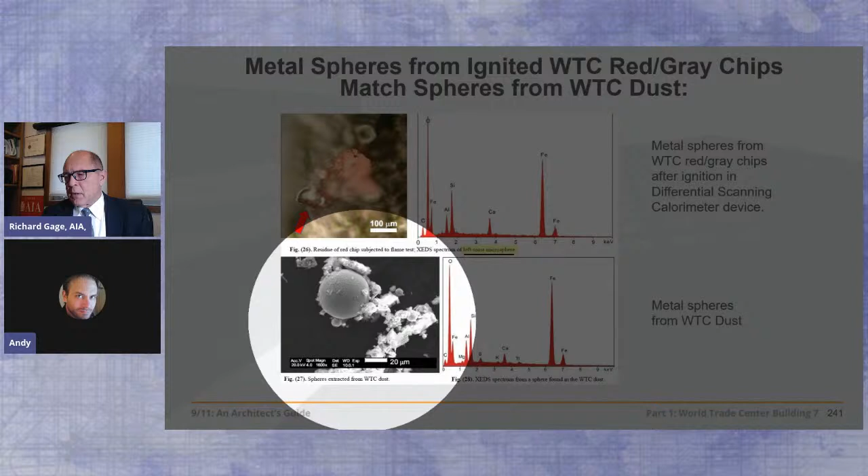And when they do, they produce what? Molten iron microspheres, with the same chemical signature as the molten iron microspheres produced and found in the World Trade Center dust.

So you see, we know where these molten iron microspheres came from. They came from these chips. It's a self-corroborating, repeatable set of experimental data that can be used to prove exactly what brought down the World Trade Center, and those responsible, because this is very sophisticated stuff.

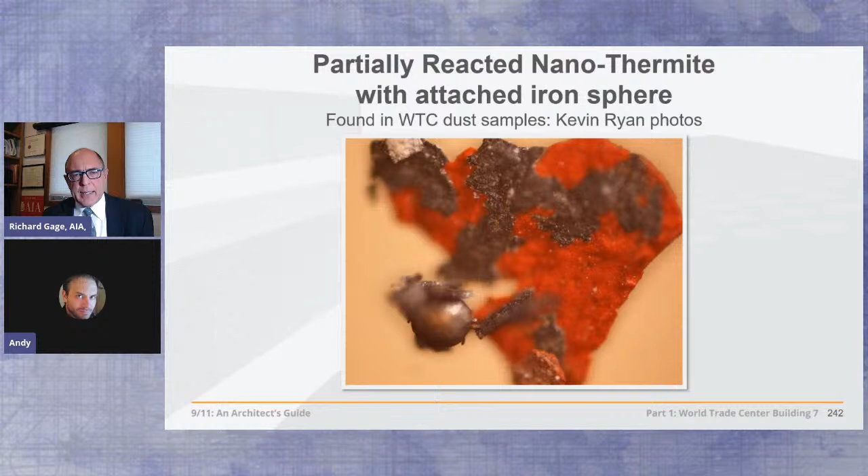As if we didn't know where these spheres came from, they're found attached to partially ignited red-gray chips, as you see here and here. When you get materials down to this size at the nanoscale, the chemical reaction is virtually instantaneous. So they've engineered something that is an incendiary to become more explosive.

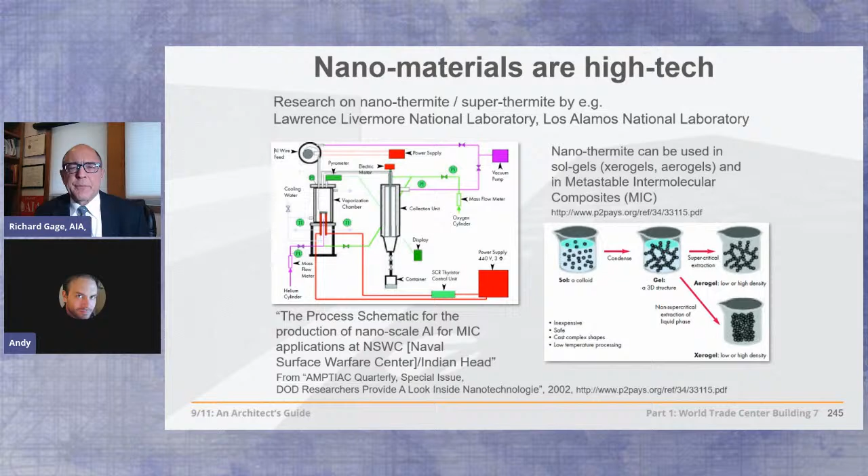Don't try this at home. It's made only in the most advanced defense contracting laboratories, not in a cave in Afghanistan. The 25-page peer-reviewed report concludes that this is active, unreacted thermitic material, a highly energetic pyrotechnic or explosive material.

It remains unchallenged. People say, oh, that's paint, but they don't produce peer-reviewed papers dismissing the results of this work. That's how you challenge somebody's conspiracy theory—if it's peer-reviewed, you put forth a paper, and this has not been able to be accomplished.

So what we're looking at is direct evidence of destruction with explosives. Fire doesn't create these features, any of them, let alone all of them. And fires, again, don't do that.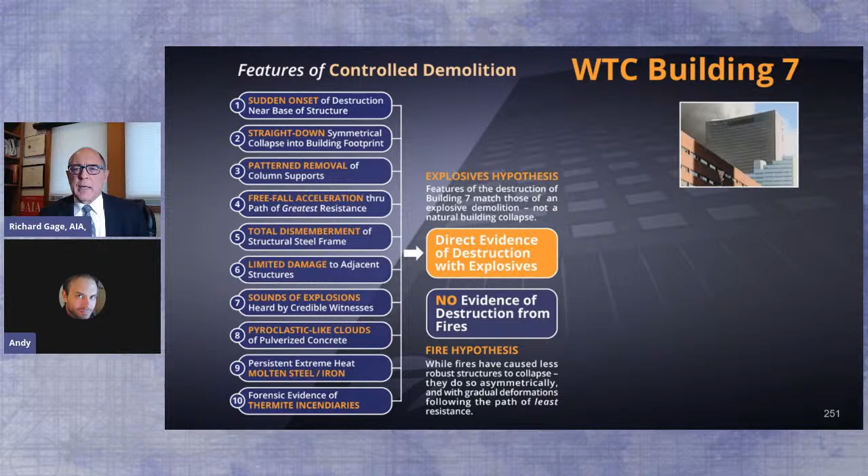Why? Well, let's look at some of the reasons. Steel conducts that heat away from the source—it's a conductor of heat. And so the steel beam never gets to that critical temperature, or rarely, 1200 degrees Fahrenheit, at which it can lose half of its strength and begin to sag.

Especially when we fireproof it, it doesn't happen. We put 2-hour fire protection on the beams. That means the beam will last 2 hours before it sags, before it's compromised. 3 hours on the columns.

And again, the fires can only last 20 or 30 minutes. So this is 4 to 6 times the protection that's needed.

We also keep the contractors from building the buildings out of combustible materials, and we keep the tenants from bringing in huge fuel loads. So we don't have these kinds of problems. In addition to all of that, we put fire sprinklers in the buildings to put them out.

In the case of Building 7, it's said that the lower half of the building's fire sprinklers were compromised by the damaging of the water mains from the destruction of the towers when they went down earlier that day.

So we look at the investigations into the building. 2002, we talked a little bit about the FEMA report. They had $600,000 worth of funding, which is almost nothing, especially compared to the investigation of Monica Lewinsky's dress.

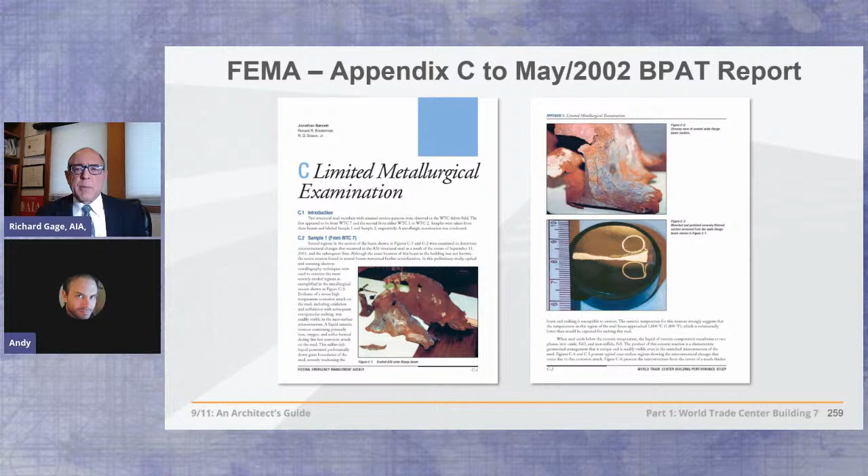And they throw out the FEMA Appendix C, which said further investigation, research, and analysis are needed to resolve the issue of how Building 7 came down. For those hoping to resolve that issue, unfortunately we have a huge problem, easily the largest and most perplexing structural failure in history. Up to 400 truckloads a day were removing debris from the site, put onto barges, sent to China for recycling. This is the destruction of evidence in a crime scene.

And with regard to Building 7, it started just two weeks after 9/11, prompting Bill Manning, editor-in-chief of Fire Engineering magazine, to cry out that crucial evidence which can answer many questions is on the slow boat to China, showing astounding ignorance of government officials to the value of a thorough scientific investigation. The destruction and removal of evidence must stop immediately, but it didn't.

And we have some experts who comment on the destruction of this building, at least those without financial or political obligations that might sway their objective opinion, like Danny Jowenko. Let's listen to him. Danny Jowenko is the expert on this in Europe. What did he say?

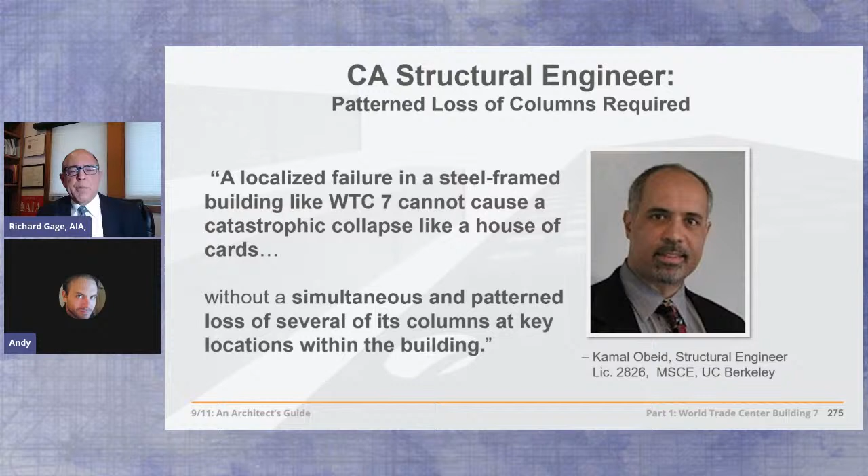Kamal Obeid from Berkeley says a localized failure in a steel frame building like World Trade Center 7 cannot cause a catastrophic collapse, like a house of cards, without a simultaneous and patterned loss of several of its columns at key locations within the building. Does that sound like something fire can do?

So we hired the University of Alaska, one of the top forensic structural engineers in the country, Professor Leroy Hulsey, to perform the finite element analysis, the computer modeling that NIST was tasked to do by Congress, but which we've seen failed miserably, producing fraudulent reports, as shown by this study, because they used the same data. And they start out: no other tall steel frame building had ever failed due to fire.

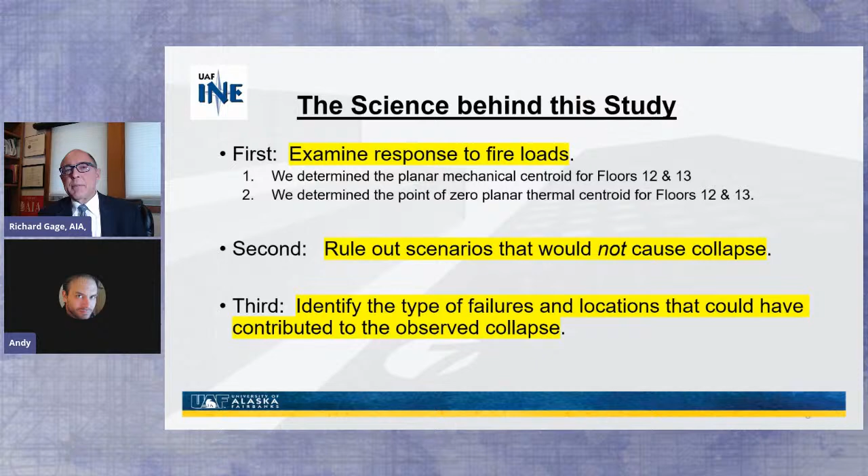So we need to ensure public safety is met, and that the failure mechanism for this structure be understood. First they examine the response to the fire loads, rule out scenarios that would not cause the collapse, and then try to identify the types of failures and locations that could have contributed to the observed collapse.

Apples to apples, they used the same input data as NIST did, even though they found that much of it was fraudulent, as I pointed out earlier. They first simulate local structural response to fire loading for floors 13 and below, as NIST did, and examined the NIST collapse initiation hypothesis very carefully. Then they simulated numerous failure scenarios that could identify what would lead to the total collapse as observed on 9/11.

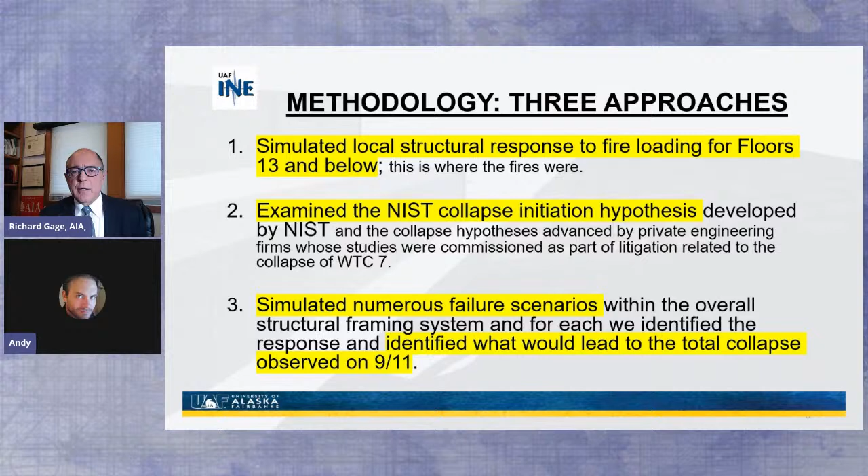So they start out putting this in AutoCAD, and use ABAQUS software and SAP2000, very sophisticated programs, modeling in parallel to see if they achieve the same results with different computing software, focusing on the same areas that NIST did with regard to their collapse theory, that these beams push this girder off the seat on column 79.

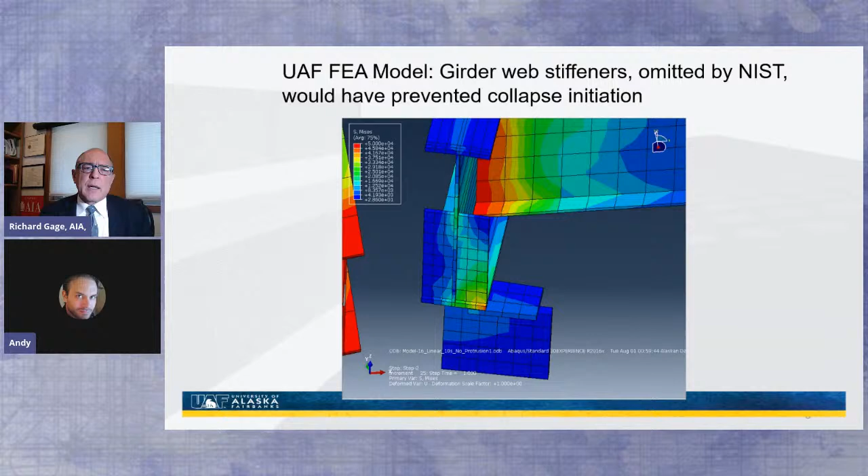And through analysis after analysis, they find the fraud that we documented earlier, in addition to new frauds. What did they find? NIST overestimated the exterior wall rigidity on the east.

These exterior walls were actually flexible, so thermal movements were from the west to the east, not the east to the west—a completely different result. The movement at the seat was in the opposite direction, the girder seat to the column. They found that the shear connections on several beams were not broken, as NIST claimed.

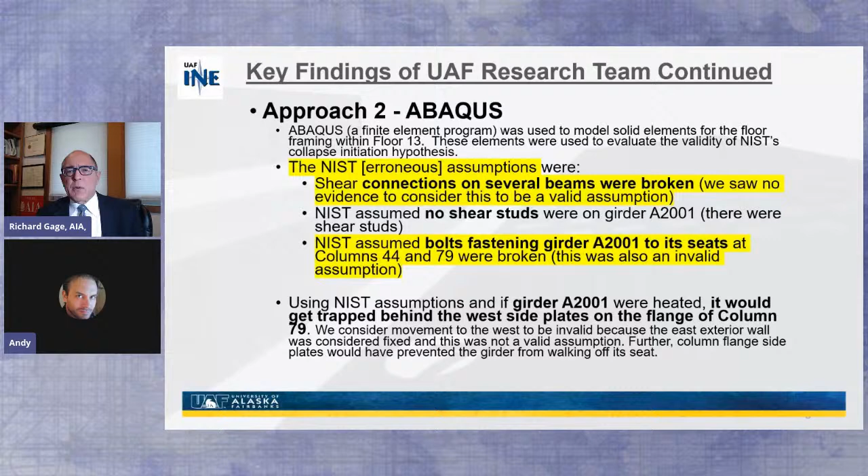They found that the bolts fastening girder A2001 to its seat were not broken either. So they also found that columns 79, 80, and 81 did not fail. And if they could have failed, the building would have tipped over.

So if the NIST scenario were true, this is what you would have seen. And in fact, in their model, you began to see that, but they stopped it just two seconds into the overall collapse of the building—or you would have seen their own model tip over, much unlike the video itself.

So they conclude at the University of Alaska at Fairbanks, the collapse of World Trade Center 7 was a global failure, not a progressive collapse as claimed by NIST, which would have involved the sequential failure of columns. The UAF study, the Hulsey study, finds that if you take out all the columns in the building almost at once—the interior followed a second or so later by the exterior—you get the same results that you saw in the video.

So fire did not cause the collapse of WTC-7. Temperatures were not high enough to cause the weakening of the steel. The thermal expansion did not result in a loss of support for the beams and girders, and World Trade Center 7 did not experience a progressive collapse, but a global collapse caused by the near simultaneous failure of all of its columns.

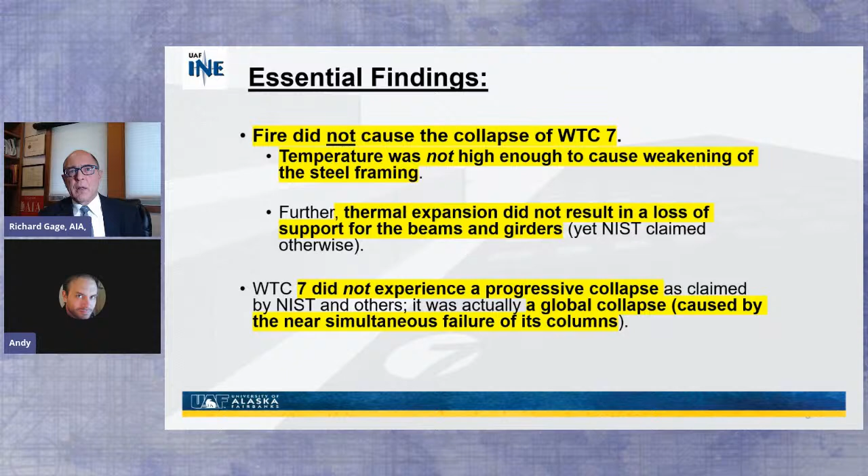The foreknowledge is even more painful to watch. In this case, we have an anonymous engineer predicting the collapse of this building because the chief asks him, well, how soon will it collapse? This is Chief Hayden. And this engineer says, well, in its current state, you have about 5 hours. Fire has never brought down a steel frame skyscraper before in history, ever—not a fireproofed one.

The prediction could only have been made with foreknowledge.

Even more interesting is these mysterious construction workers walking away from building 7, hearing an explosion, looking back over their shoulder to the building, and then looking straight into the CNN camera and saying this.

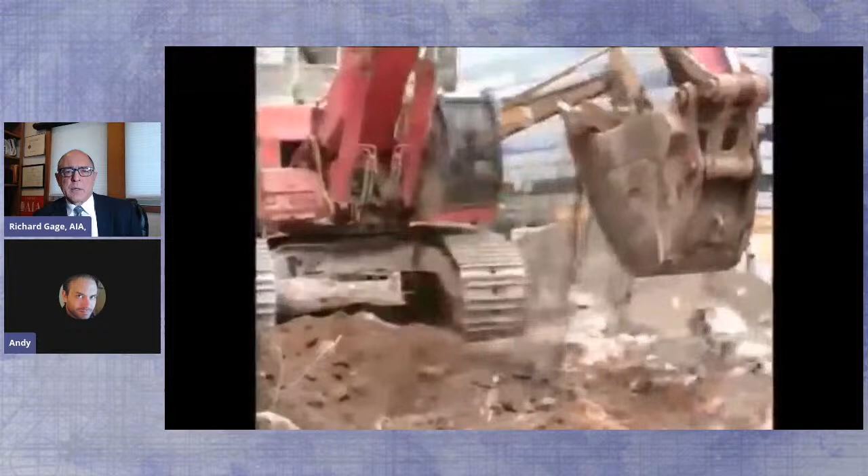I remember getting a call from the fire department commander telling me that they were not sure they were going to be able to contain the fire. And I said, we've had such terrible loss of life. Maybe the smartest thing to do is pull it. And they made that decision to pull, and then we watched the building collapse.

He says, oh no, I didn't mean pull the building. I meant pull the firefighters out of the building. Well, pull it is used as a term in the controlled demolition industry to bring a building down. And firefighters don't make the decision to pull buildings. So this whole quote is a mess.

But the firefighters weren't even in the building fighting the fire. They made the decision fairly early on not to attempt to fight the fire, due in part to the damage World Trade Center 7 had from the collapsing towers. They were told not to fight the fire, so they weren't in there at all.

So none of it makes sense in terms of what he's saying. No manual firefighting operations were taken. No firefighting in World Trade Center 7. They were told it had structural damage, that it was going to come down, or it could come down on its own. Even though the structural damage was not a factor in the building's collapse, according to NIST.

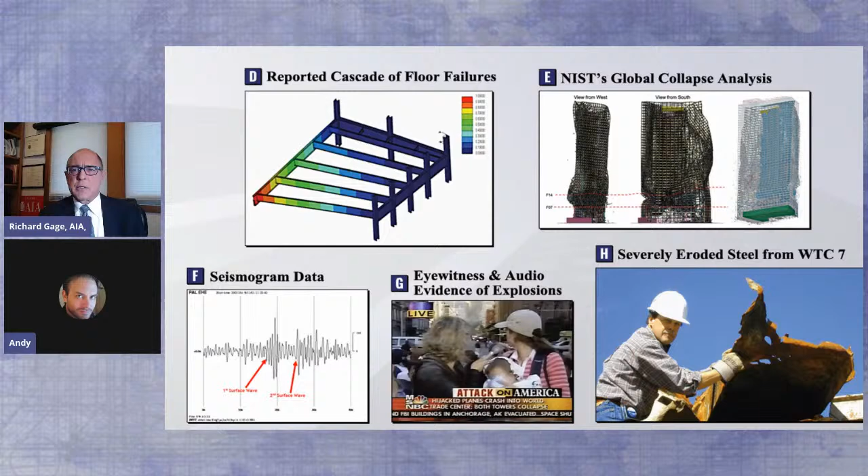And guess what? You can go to Congress and we're going to help you. Andy, how are we going to help them? Absolutely. That's the way our government is designed and supposed to work. So let's pretend that is correct and try to reach out to these people and get these meetings and let them hear about this evidence that is so important.

So the way that you do it and reach out to Congress is first find out who your congressman is. If you don't know already, you go to their website and you look up on their forms. You just submit a request for an interview, and you can contact us at congress@ae911truth.org and we'll give you some advice on how to reach out to them, even give you a letter if you need that. But basically, you make a request that you will talk to them about AE 9/11 Truth's evidence, World Trade Center 7, and of course, the Bobby McIlvaine World Trade Center Investigation Act, and that's the path to justice for nearly 3,000 people who died that day.

Bobby McIlvaine was entering the North Tower lobby on the morning of September 11th. He was killed by an explosion as he was doing so, and of course, by the nature of how he died, we have immediate questions that put the official story on notice as being incorrect. So basically, we named this bill after him, and it would set up a select committee.

It can be passed in either house of Congress that would look into the evidence that Richard has been talking about all of these years. And it's written in such a way that they actually have to look into the specific evidence. They can't just glaze over it.

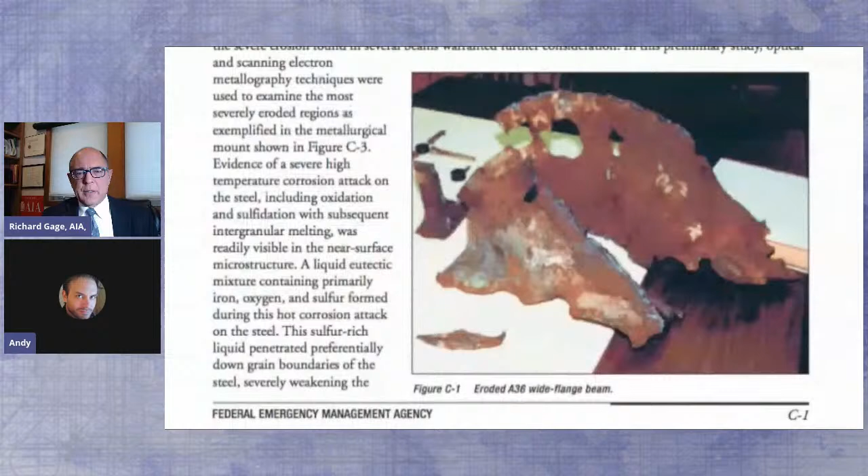In an office fire, you cannot generate enough heat to melt steel. There were these iron microspheres present in all of the dust samples. They needed to have been formed in extremely high temperatures. All the characteristics of the microspheres, along with what I see in the attack of the beams that were actually found, tell me that thermite was involved.

In the dust, what we have found is a modern version of thermite, which we call nanothermite. NIST concedes that they found no evidence for explosives. So then we asked them, well, did you look? And they said, no, we did not look for explosives or residues of explosives. And in fact, the evidence is overwhelming that these red-gray chips are very high temperature incendiaries.

We have watched as scientific integrity has been undermined and scientific research politicized in an effort to advance predetermined ideological agendas. If this is a crime, I think everybody agrees it's a crime. Evidence was removed from the scene of the crime. You can't do science when you are deprived of the evidence and when your hypothesis is the least valid instead of the most likely. When the most likely hypothesis in the case of Building 7 wasn't even mentioned. This is not science.